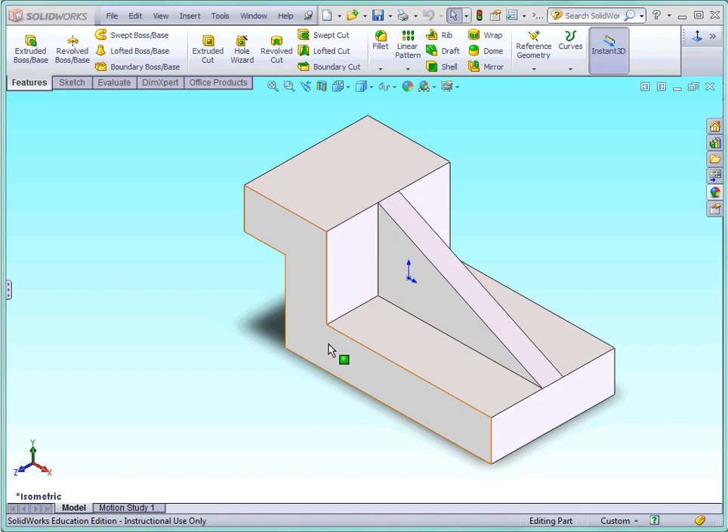Let's have a go at making this model. The model could be produced by extruding a series of rectangles. However, it will be easier to produce a sketch of the blue shaded cross section and then extruding. Switching to a new model, select Extruded Boss Base from the Features menu and open a sketch on the front plane.

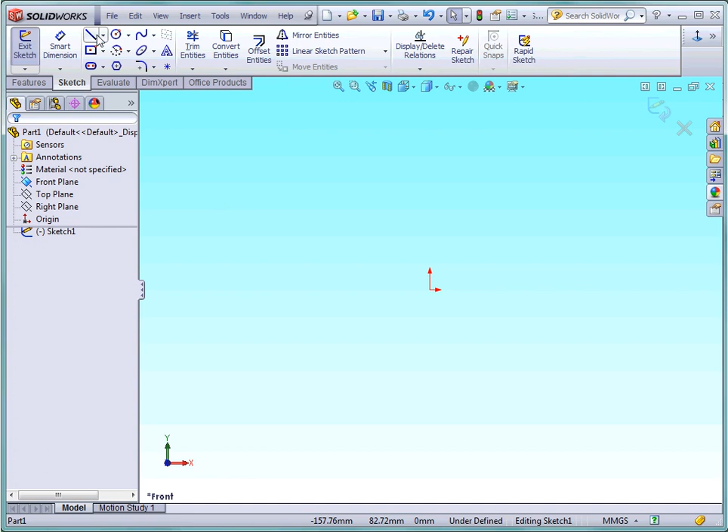From the Sketch toolbar, select the Line command. Roughly sketch the feature cross section. Remember, dimensions are added after sketching, so accuracy is not important. Starting off with a line endpoint coincident with the origin, the yellow tooltip will indicate when the lines are horizontal or vertical.

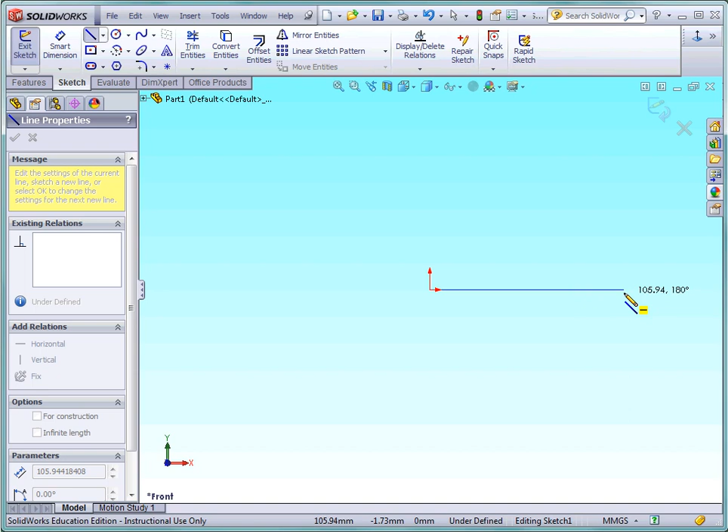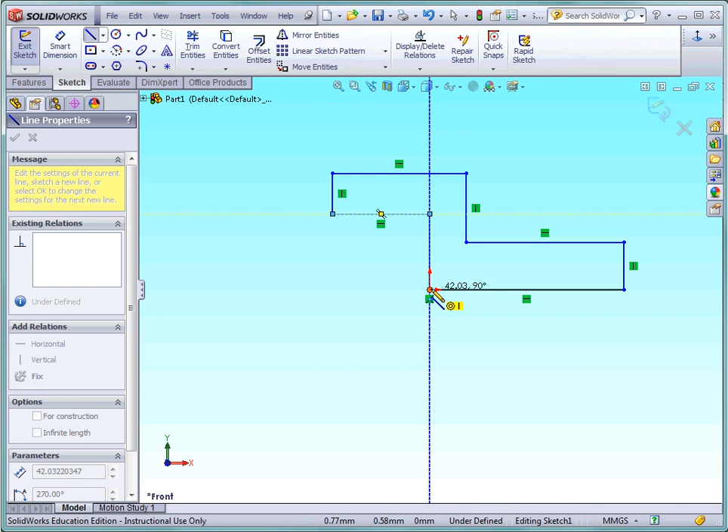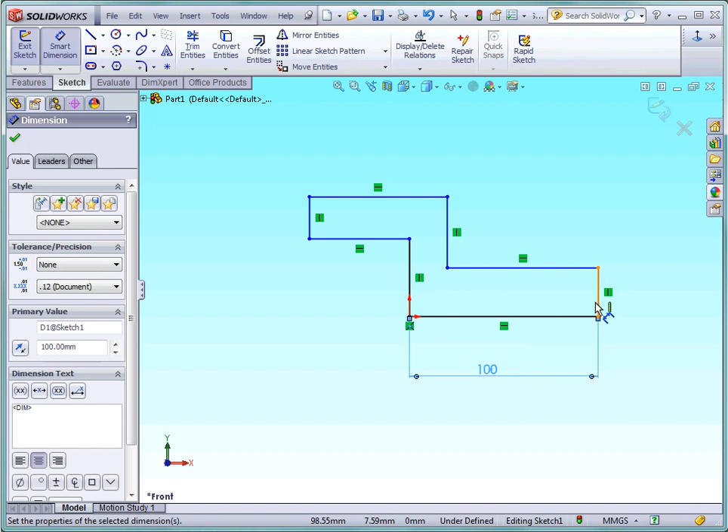Phantom lines will occasionally appear to indicate some sort of relationship with other sketch geometry. In this case, the phantom line indicates the cursor is vertical to the origin. Dimension the sketch using the Smart Dimension tool with the datum set at the origin. At any time, a zoom all or fit to screen can be performed by typing an F.

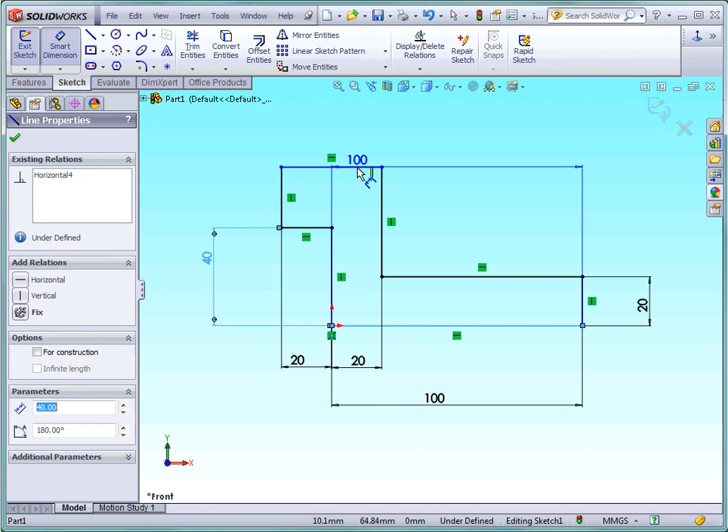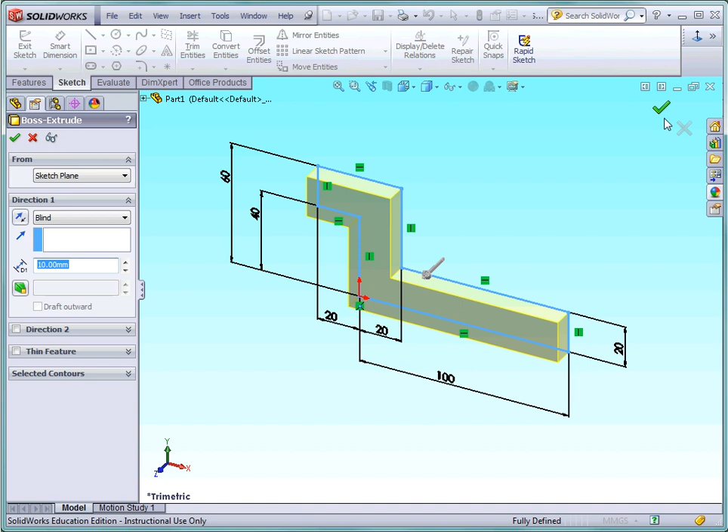With the geometry fully defined, we can exit the sketch. In the Boss Extrude Manager, set the depth to 60 mm and choose OK. We now need to think about producing the triangular shaped extrusion. There could be a problem here because we do not have a plane available on which to place the sketch geometry.

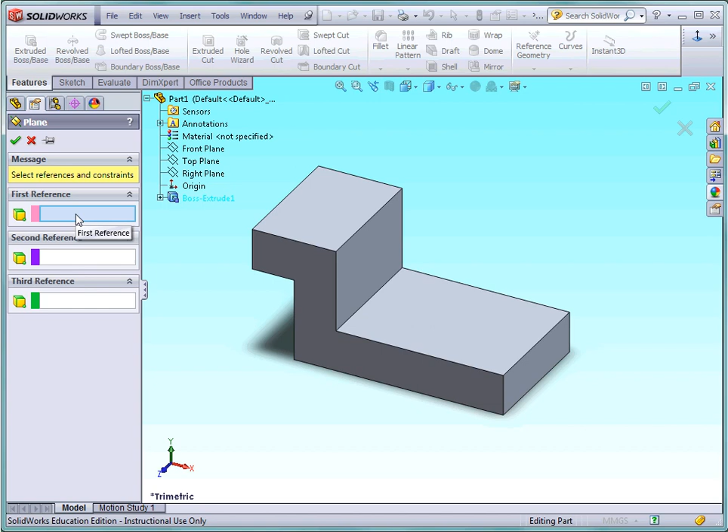In this case, we can add a plane by going to Reference Geometry and selecting Plane. The Plane Manager opens on the left hand side of the screen and the Feature Manager moves into the graphics area. In the first reference box, choose the front plane and set the offset distance to 30 millimeters, which is half the thickness of Boss Extrude 1.

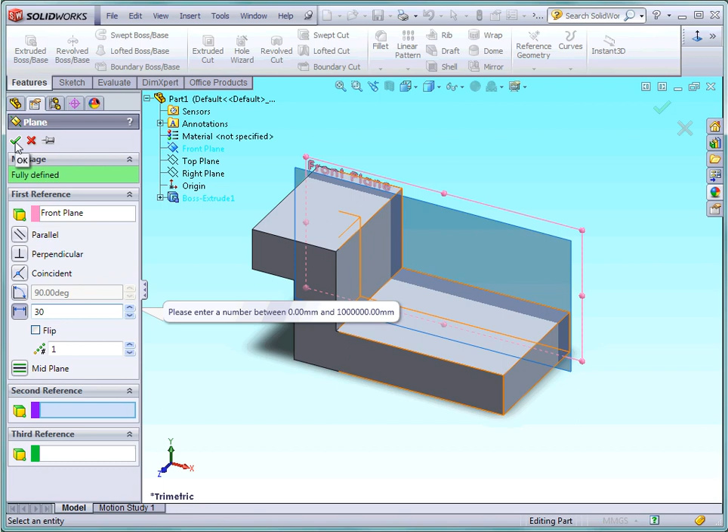This will create a new plane in the middle of our model on which we can draw the sketch geometry. Select OK. You can see plane 1 has been added to the Feature Manager design tree. Select Extruded Boss Base and open the sketch on plane 1. Switch to a front view, and the triangle can now be drawn by picking the endpoints of the existing model geometry.

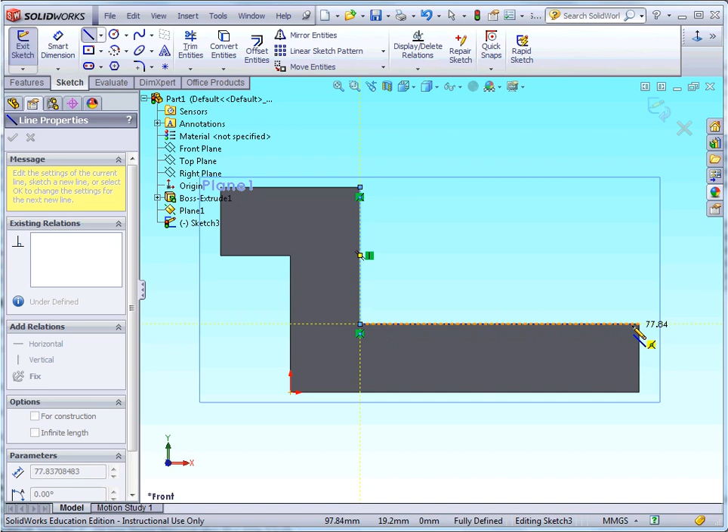As these endpoints have previously been defined, there are no dimensions to add to the sketch. Another method of drawing the triangle involves using the Convert Entities tool. Convert Entities allows model geometry or contours from existing sketches to be projected or copied onto the sketch plane of the current sketch. Let's delete the triangle and select Convert Entities from the sketch toolbar.

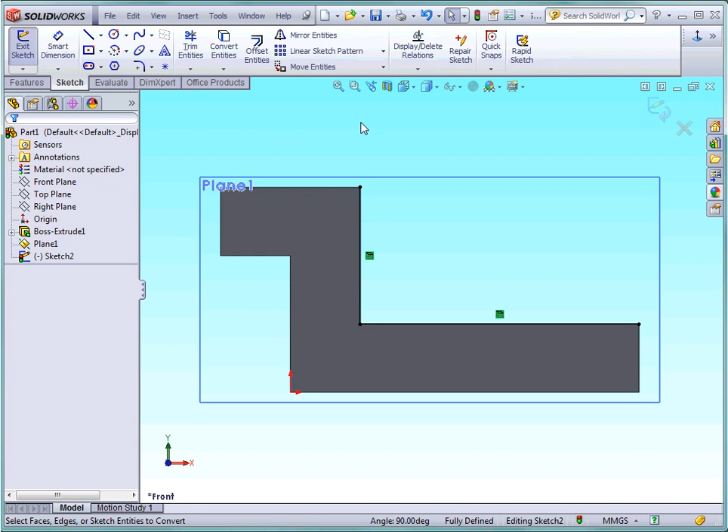Select the vertical and horizontal edges as shown and select OK. The edges are converted to lines within this sketch, and the diagonal can then be drawn between the line endpoints. Again, no dimensioning is required. Switch back to an isometric view and exit the sketch.

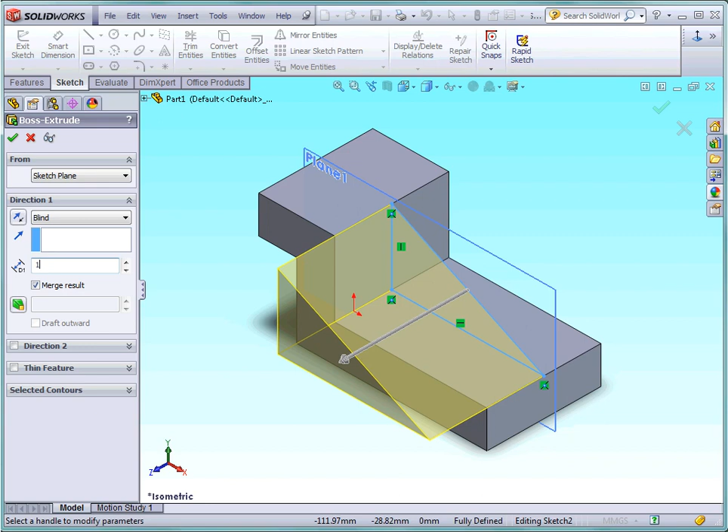In the Boss Extrude Manager, set the depth to 10 millimeters and in End Condition, choose the Midplane option. This extrudes the feature an equal amount around the sketch plane. Select OK. We could have used the midplane option when producing Boss Extrude 1, making the need for an additional sketch plane redundant.

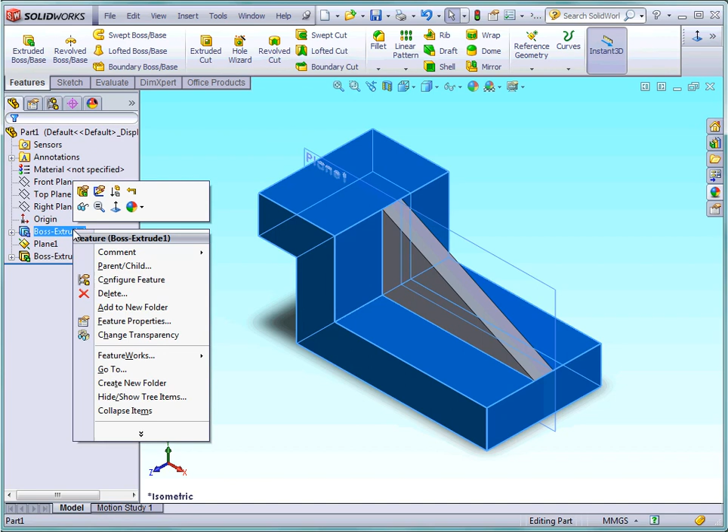Let's go back and alter Boss Extrude 1. Right click and select Edit Feature. In End Condition, change the option to midplane and select OK. This gives quite a curious result because plane 1 is no longer in the middle of Boss Extrude 1. The problem can be solved by moving sketch 2 onto the front plane.

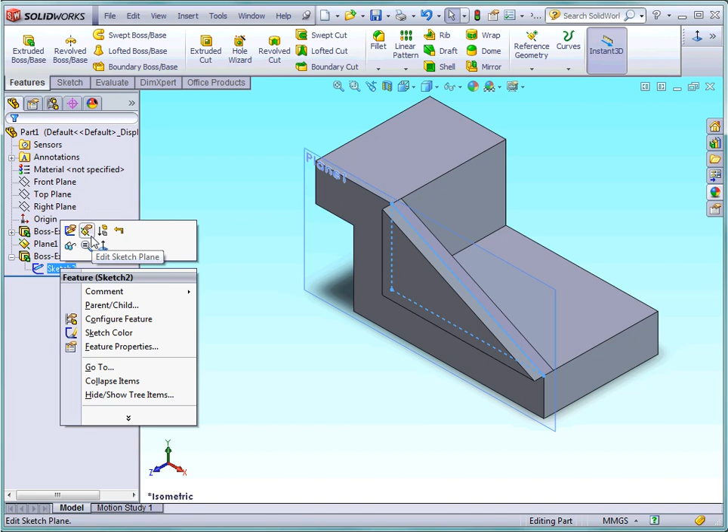Expand Boss Extrude 2 and right click Sketch 2 and select Edit Sketch Plane. Change plane 1 for the front plane and select OK. If required, plane 1 can now be deleted.

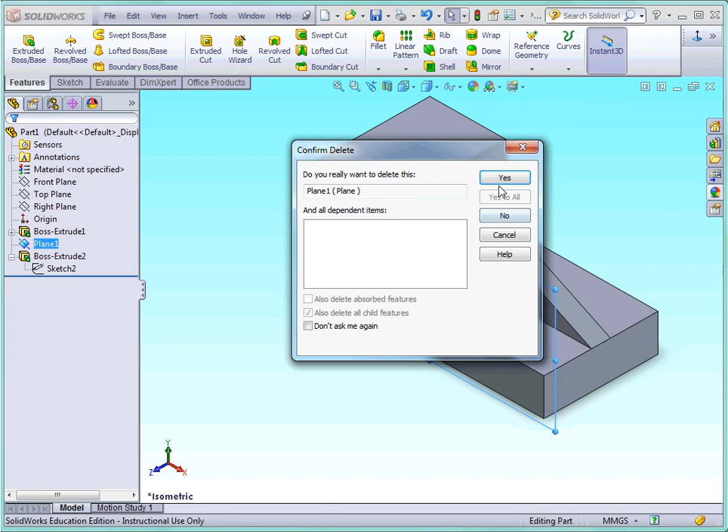Another method of producing the triangular extrusion involves using the rib command. Extruded boss base and extruded cut only work when the geometry is closed, such as a circle or square. Rib is a special type of extruded feature which can be created from open sketched contours. It adds material of a specific thickness in a specified direction between the contour and an existing part.

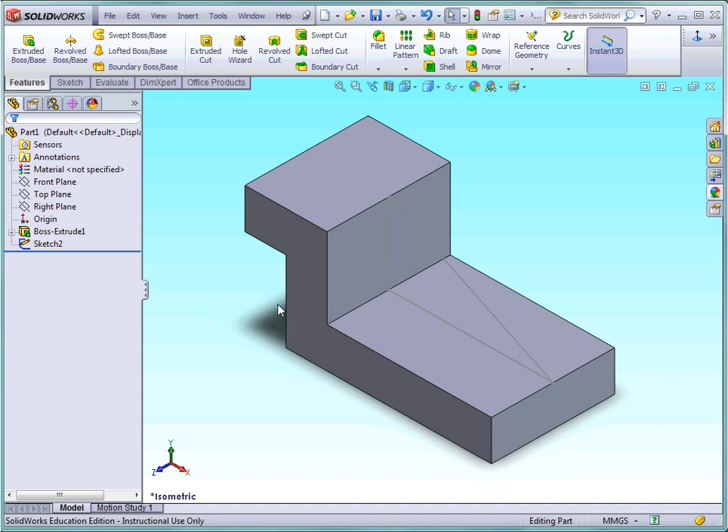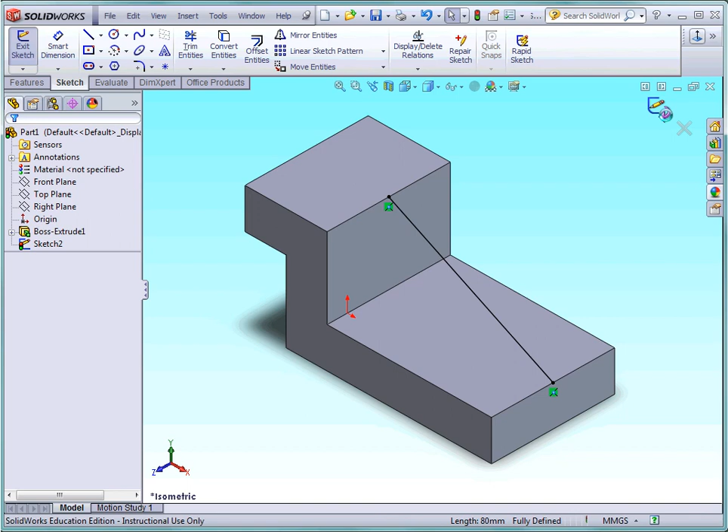Let's delete Boss Extrude 2. Deleting the feature does not automatically delete the sketch, so we can reuse Sketch 2 to create the rib. Right-click Sketch 2 and select Edit Sketch. For the rib function to work, the diagonal line is the only piece of geometry required, so the horizontal and vertical lines can be deleted. Exit the sketch and select the rib command.

We're going to create the rib from an existing sketch, so expand the feature manager and select Sketch 2. In the rib manager, select the both sides option and set the rib thickness to 10 mm. Switch to a front view to check the extrusion direction.

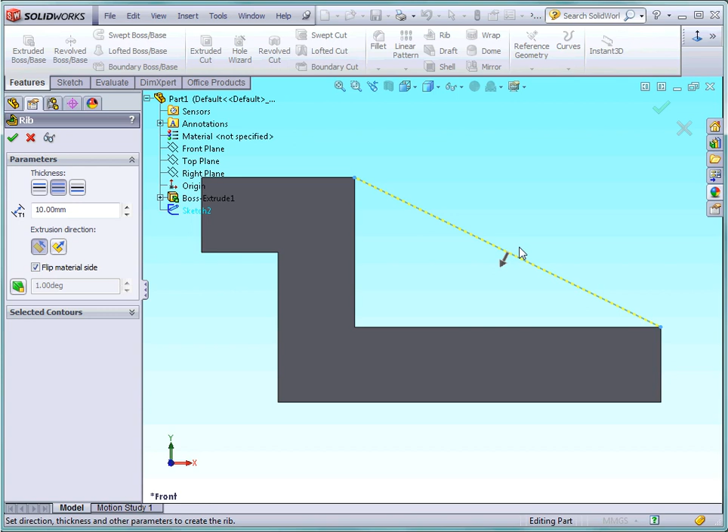With the arrow pointing in this direction, the rib will try to extrude to infinity. Check the flip material side so the arrow points towards the existing model faces. Switch back to an isometric view and select OK.

In this tutorial, we have seen how the same model can be created using different techniques. You may have your own ideas on how to create the model. The important thing to remember is to get the model right and then identify what you could have done differently in order to improve your modelling or sketch technique.